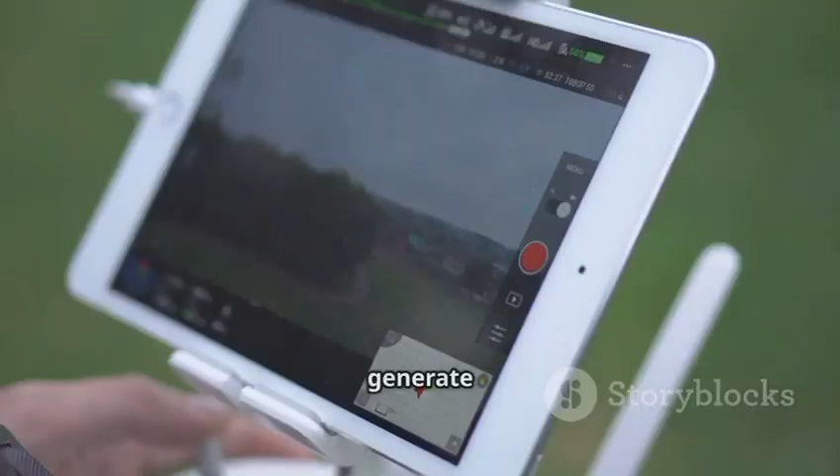This isn't a futuristic gimmick. It's happening right now, and it's a massive leap in efficiency and safety. Drones can generate incredibly detailed three-dimensional topographic maps, conduct volume calculations for earthworks, like how much dirt you need to move,

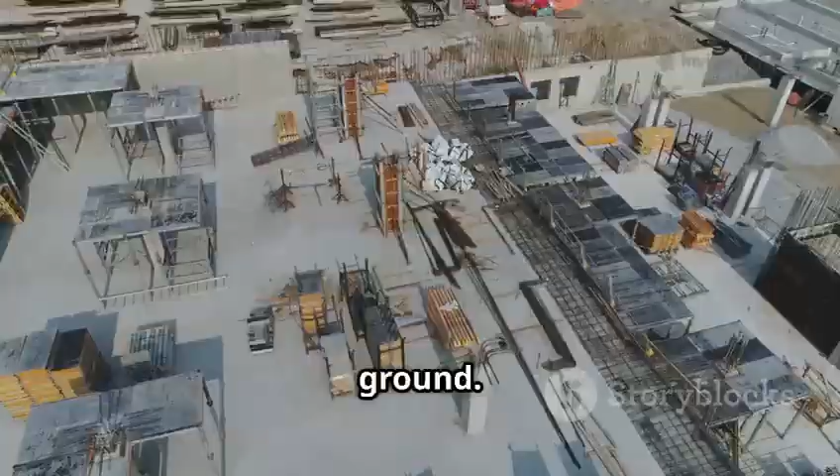and monitor construction progress with a level of detail you could never get from the ground. The key is not just flying the drone, but knowing how to use the software that processes the data, like Pix4D or DroneDeploy. These platforms stitch together thousands of images to create precise orthomosaic maps and three-dimensional models. For large-scale land development, mining operations, and infrastructure monitoring, drone skills are becoming a must-have. It's a perfect example of how technology is augmenting our abilities, letting us do our jobs better, faster, and safer.

We've talked a lot about software and technology, and it's all critically important. But I'm going to tell you a secret. The most successful engineers I know aren't just technical wizards. They are master communicators. You can be the smartest person in the room, but if you can't explain your complex ideas to a client, a city council, or your own team, your brilliance is trapped in your own head.

This is where soft skills come in, and frankly, they're not soft at all. They're power skills. We're talking about crystal clear technical communication and report writing. Can you write a report that is both technically sound and easy for a non-engineer to understand?

But it goes beyond that. Are you a good collaborator? Engineering is a team sport, and you need to be able to work effectively with architects, contractors, and other specialists. Do you have leadership potential? Can you motivate a team and take ownership of a project?

How are your presentation skills? One day you will have to stand in front of a client and convince them that your multi-million-dollar design is the right one. And finally, negotiation. Whether you're negotiating a contract, a change order, or just a deadline with your boss, this skill is priceless.

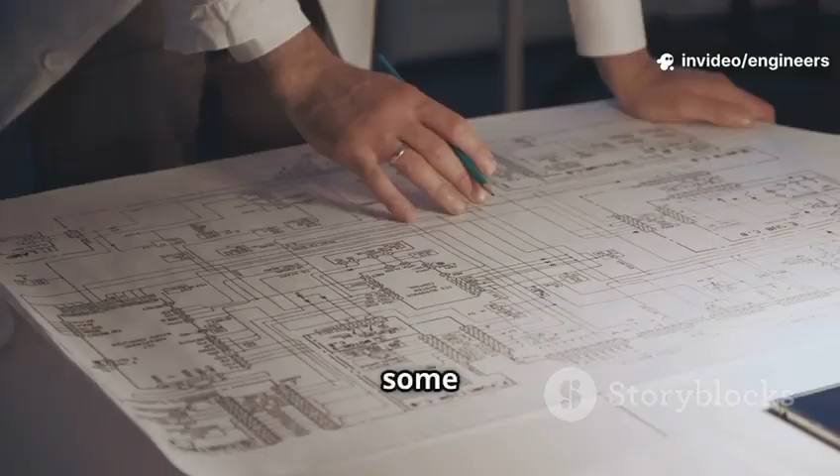Now let's shift gears and talk about some skills that are on the decline. And this first one might be a little controversial for some: pure two-dimensional AutoCAD drafting. For decades, AutoCAD was the undisputed king, the essential tool that every single engineer had to master. And look, it's still used.

But here's the critical distinction. It's being used less and less as a standalone skill. The industry has moved toward the integrated three-dimensional and BIM environments we talked about earlier. Simply knowing how to draw lines, arcs, and circles in 2 dimensions is no longer enough to make you a competitive candidate.

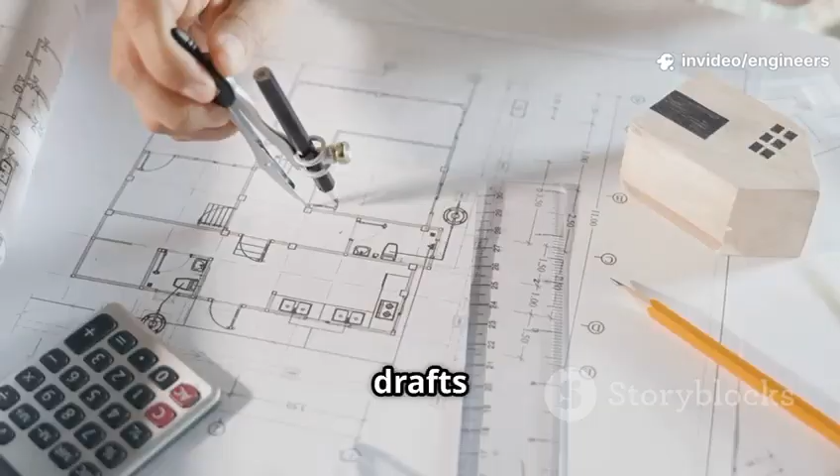The problem with pure two-dimensional drafts is that they are just lines on a page. They are dumb drawings. They don't contain the rich data of a BIM model, and they are notorious for creating coordination problems. A change made on one drawing has to be manually updated on 10 others, which is a recipe for errors. The risk of clashes between different systems, like plumbing and electrical, is huge.

The modern alternative is to use tools like AutoCAD Civil 3D or Revit, where the two-dimensional drawings are generated automatically from the intelligent three-dimensional model. So if you update the model, all the associated drawings update too. The skill isn't dead, but its context has completely changed.

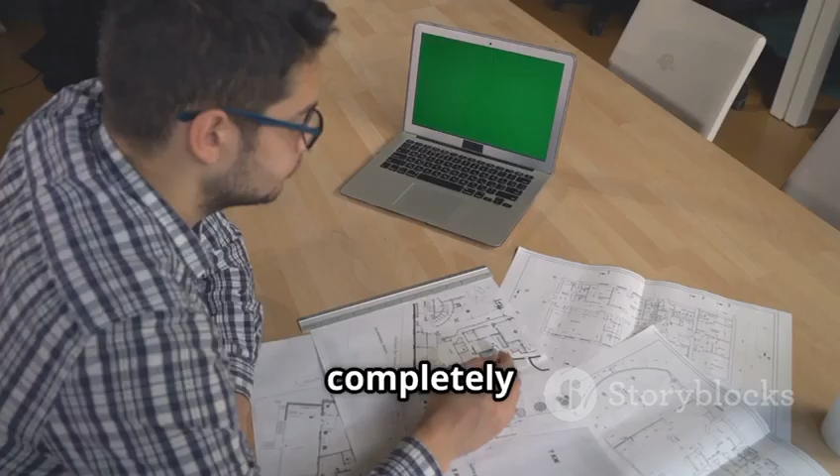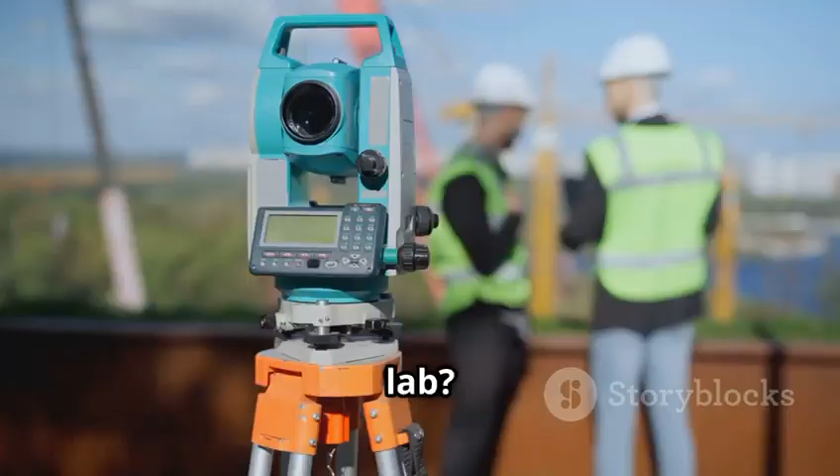Let's take a walk down memory lane. Do you remember learning how to use chains, measuring tapes, and dumpy levels in your university surveying lab? It was a rite of passage for every civil engineering student. We learned the principles of triangulation and leveling through painstaking hands-on effort.

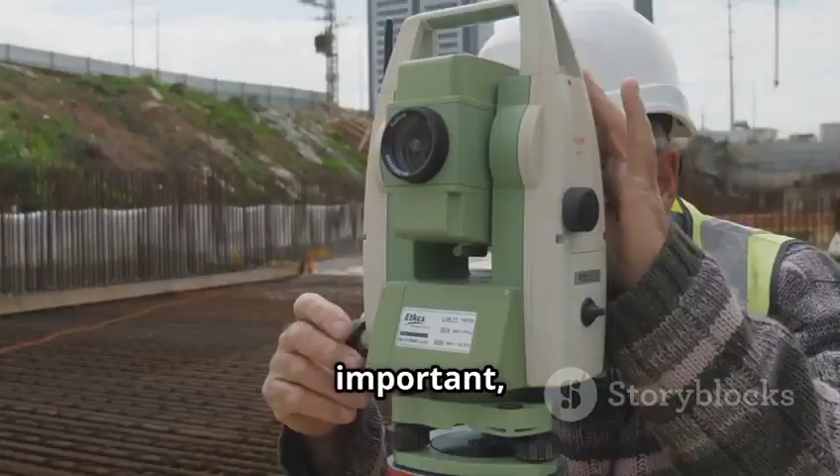And while understanding those principles is still fundamentally important, the actual practice of using these manual tools on a professional job site is becoming increasingly rare. It's like learning how to use an abacus to understand math, a great educational tool, but you wouldn't use it to do your company's taxes.

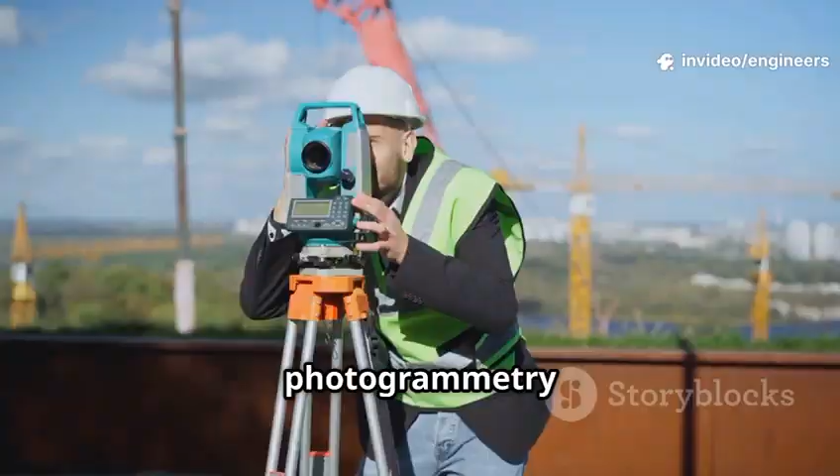The simple truth is that modern tools have made these manual techniques largely obsolete for professional work. Total stations, GPS and GNSS receivers, and now drone photogrammetry are infinitely faster, more accurate, and require less manpower. Why spend a day with a team of 3 people meticulously measuring a plot of land with a tape and level when one person with a GPS rover can do it in an hour with millimeter accuracy?

Now, these manual skills are still taught in academics to instill a foundational understanding, and they might be used on very small-scale, low-budget projects, but relying on them as a primary professional skill is a career dead end.

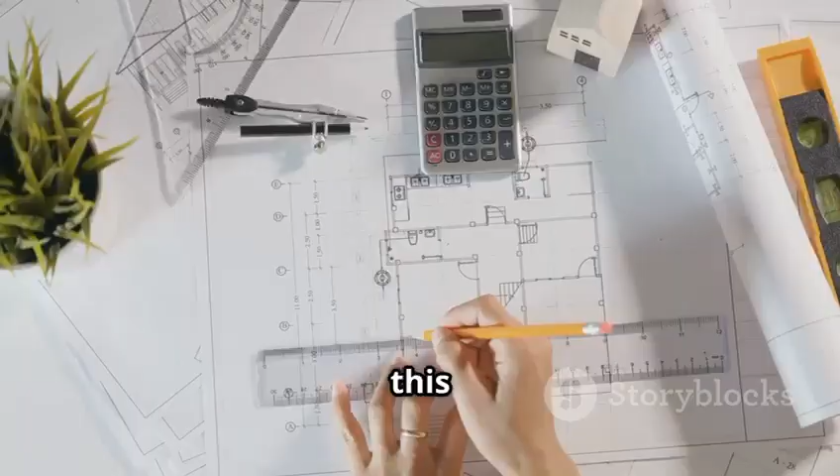Another classic skill that's being transformed by technology is quantity estimation. This is the process of calculating exactly how much material you'll need for a project, like how many cubic meters of concrete, how many tons of steel, or how many linear feet of pipe. In the old days, this meant poring over two-dimensional drawings with a scale ruler and a calculator, manually counting every single item, and painstakingly entering it into a spreadsheet.

It was honestly incredibly tedious, time-consuming, and prone to human error. Forgetting to carry a 1 or misreading a dimension could lead to budget overruns worth thousands or even millions of dollars. Today, this manual process is being completely superseded by software.

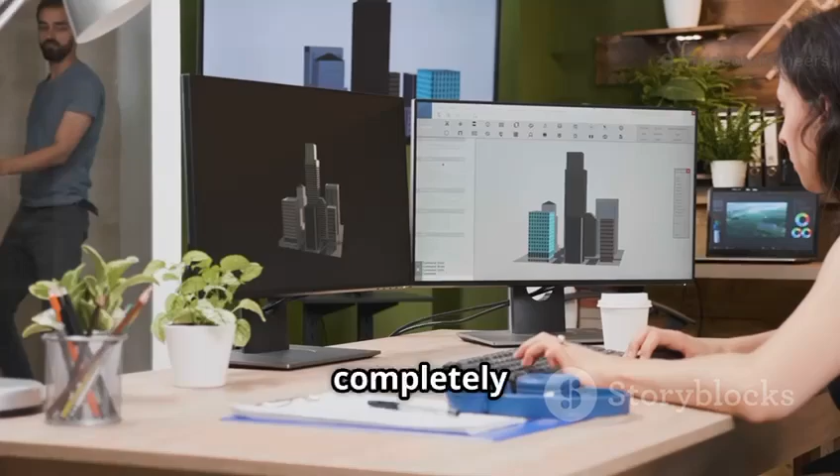Remember our friend BIM? One of the most powerful features of a BIM model is that it can generate a precise quantity takeoff automatically with the click of a button. Because every object in the model contains data about what it is, the software can instantly tell you that you have exactly 4,782 cubic feet of concrete and 12.3 tons of rebar.

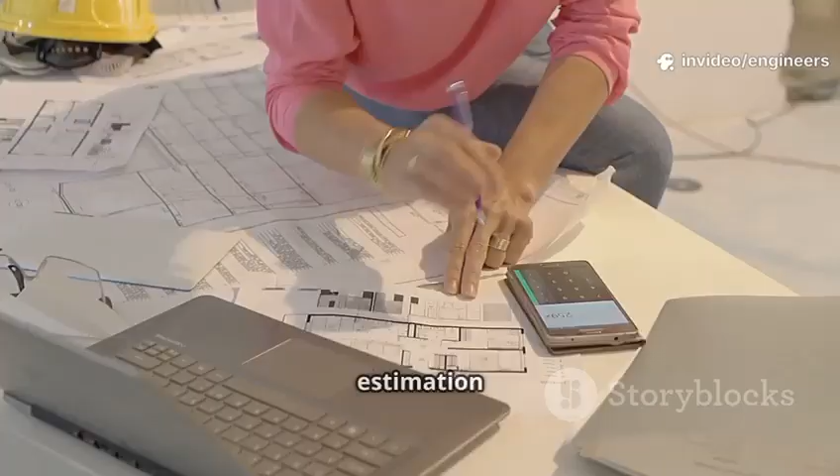Specialized estimation software can then link this data directly to cost databases to generate accurate budget reports. While the ability to do a quick, back-of-the-envelope calculation is still useful, relying solely on manual estimation from two-dimensional drawings is inefficient and risky in today's data-driven world.

The role of the site supervisor or field engineer has traditionally been very hands-on. You walk the site, you eyeball the progress, you check the quality of the work with your own eyes, and you rely on your years of experience to spot problems. This experience is and always will be incredibly valuable. However, the idea of a supervisor whose only skill is walking the site and managing crews is becoming outdated.

The modern construction site is a hub of technology, and the supervisor needs to be just as comfortable with a tablet as they are with a tape measure. The preference now is for tech-enabled supervision.

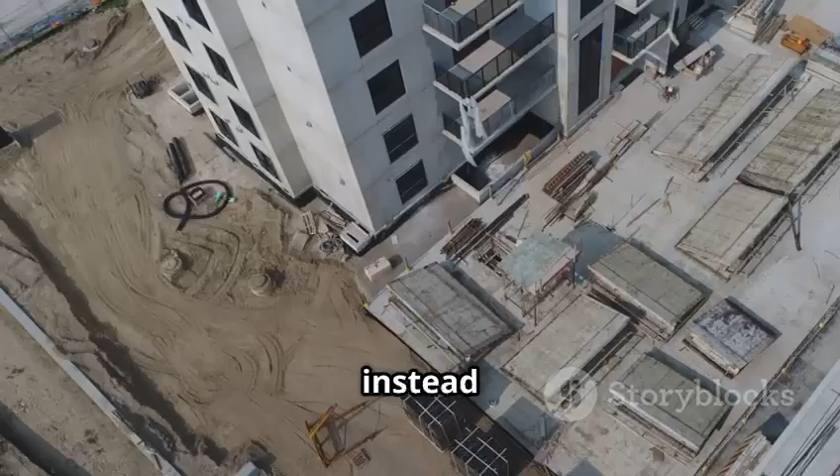This means using project management apps on a tablet to update progress in real time, which instantly notifies the project manager back in the office. It means using drones to get a daily aerial overview of the site, instead of just what you can see from the ground. It means using laser scanners to verify that what's been built matches the digital model down to the millimeter.

This integration of technology allows for better documentation, faster communication, and more accurate quality control. The experience is still key, but it needs to be combined with the ability to leverage these powerful new tools.

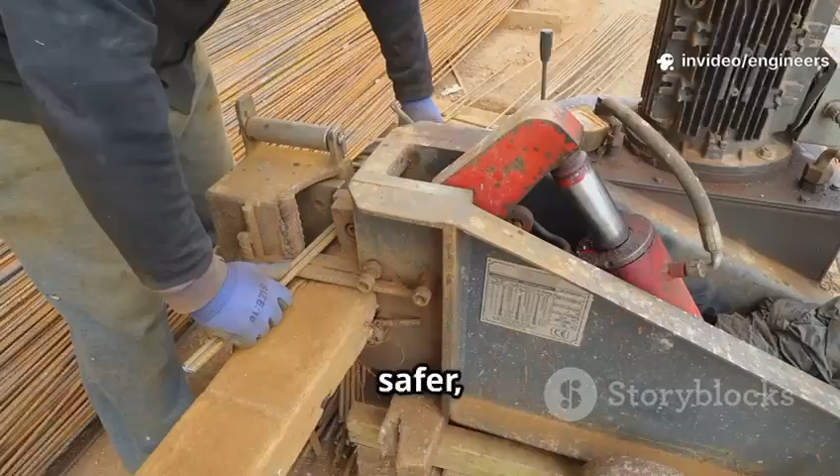Finally, let's talk about the actual nuts and bolts of construction. Certain traditional methods are being phased out in favor of safer, faster, and higher quality alternatives. A great example is conventional shuttering, or formwork, using timber planks.

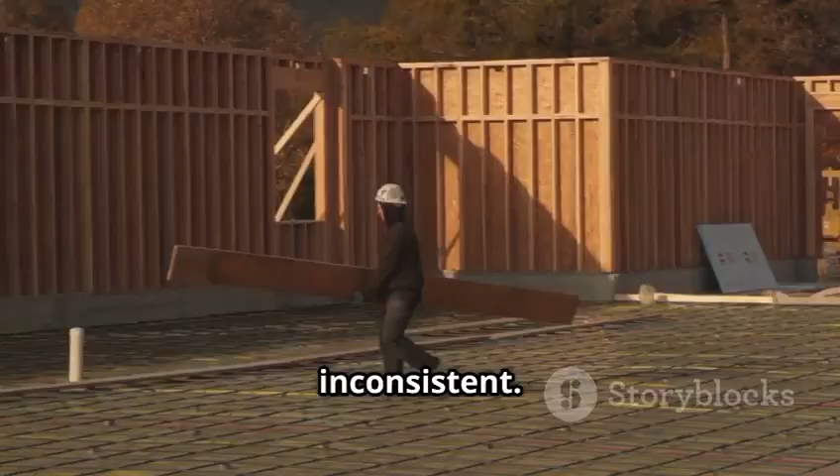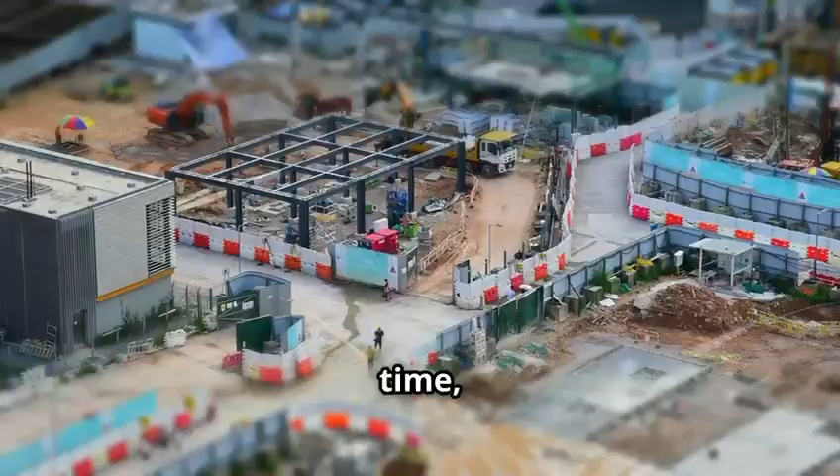It's time-consuming to build, can be wasteful, and the quality of the finish can be inconsistent. Today, we have modular, reusable formwork systems made of steel or aluminum that can be assembled and disassembled much more quickly and provide a superior finish. This saves time, reduces waste, and improves safety on site.

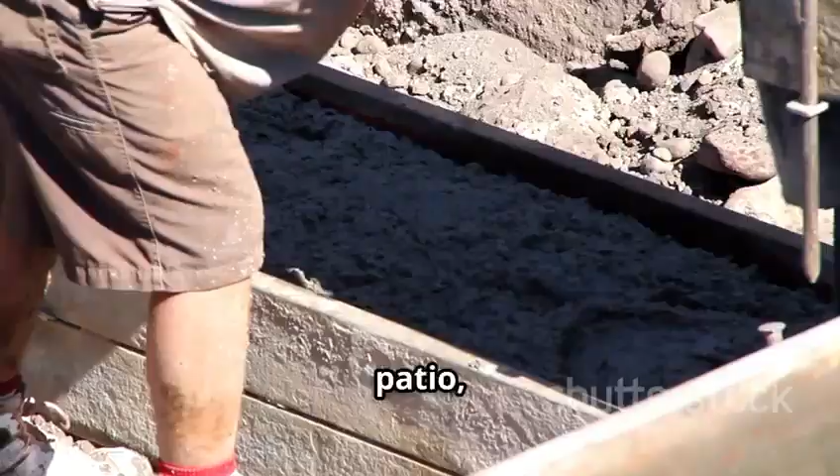Another classic example is the manual preparation of concrete mix on site for major structural elements. While it might be fine for a small patio, for a large project, it's impossible to guarantee the consistent quality and strength required. This is being replaced by ready-mix concrete, or RMC, delivered from a batching plant where the mix is computer-controlled for perfect consistency every single time.

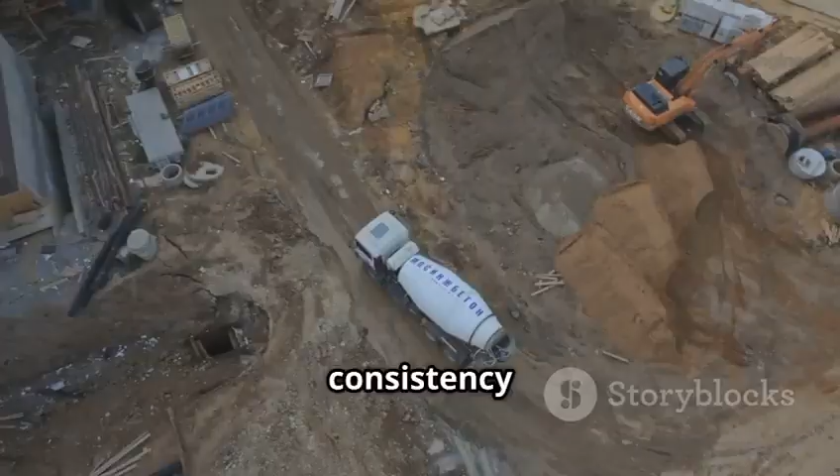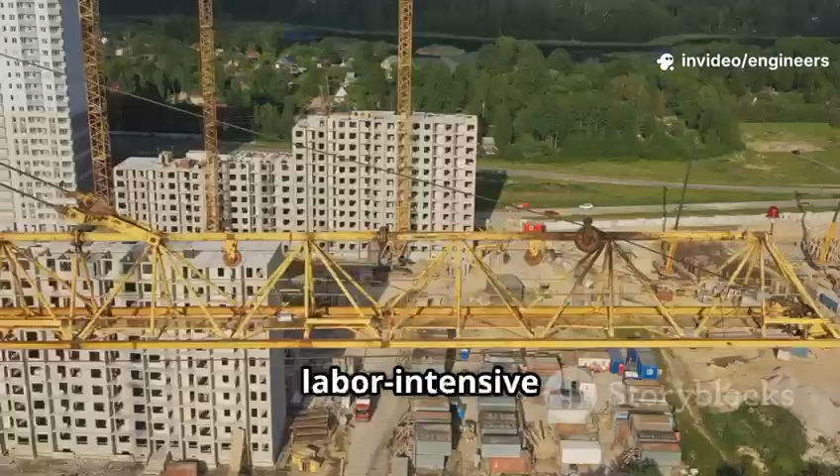The theme here is a move towards prefabrication, modularization, and system-based approaches that prioritize quality control, speed, and safety over traditional, labor-intensive methods. Knowing and advocating for these modern practices is a key skill for today's engineer.

Okay, so we've covered a lot. You might be feeling a little overwhelmed thinking, how am I supposed to learn all of this? But don't worry, building your skills is just like any other engineering project. You need a good plan.

For software like Revit, AutoCAD Civil 3D, and STAAD.Pro, platforms like LinkedIn Learning, Coursera, and Udemy offer fantastic project-based courses. You can expect to spend around 40 to 60 hours to get proficient, and costs can range from a monthly subscription to a few hundred dollars for specialized certification programs. The key is to not just watch the videos, but to actually do the projects.

For more advanced topics like project management, pursuing a PMP certification is a bigger commitment, often requiring months of study and documented project experience, with costs running into the thousands. For skills like drone surveying or GIS, look for specialized in-person or online workshops that offer hands-on training with the actual hardware and software. These can be a bit pricier, but offer invaluable practical experience.

The most important thing is to start small. Pick one in-demand skill that interests you, dedicate a few hours each week, and build from there. Continuous learning is the new normal, and investing in your skills is the single best investment you can make in your career.

So at the end of the day, the world of civil engineering is evolving. The tools are getting smarter, the projects are getting more complex, and the demands on us as engineers are greater than ever. But here's the cool part. That's not something to be scared of.

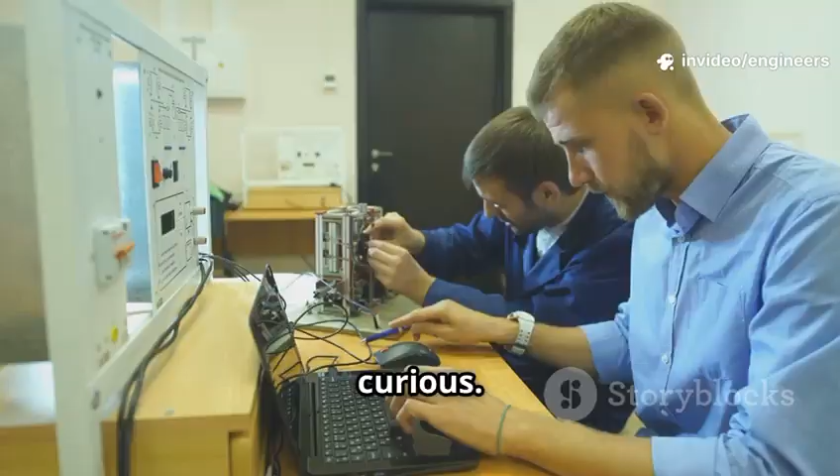Don't be the engineer who's still trying to use a slide rule in the age of supercomputers. Be curious. Be a lifelong learner. Pick one of these skills we talked about today. Dive in and start building. The satisfaction you'll get from mastering a new tool and applying it to create something real is one of the best feelings in the world.